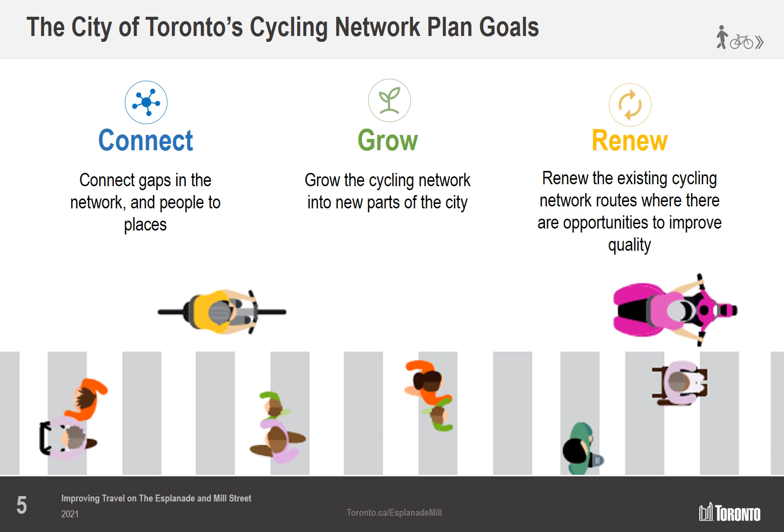Policy, plans, and goals. This project is built on a foundation of policies including the city's official plan, the Vision Zero Road Safety Plan, and TransformTO. Toronto's council-approved cycling network plan is based on three pillars: connect, grow, and renew the cycling network. This part of the city has seen recent extensions of the cycling network such as Sumach Street last year, enhancements to existing routes such as Shuter Street, and we'll be seeing more such improvements to Cherry Street south of Lakeshore later this year, but gaps still exist.

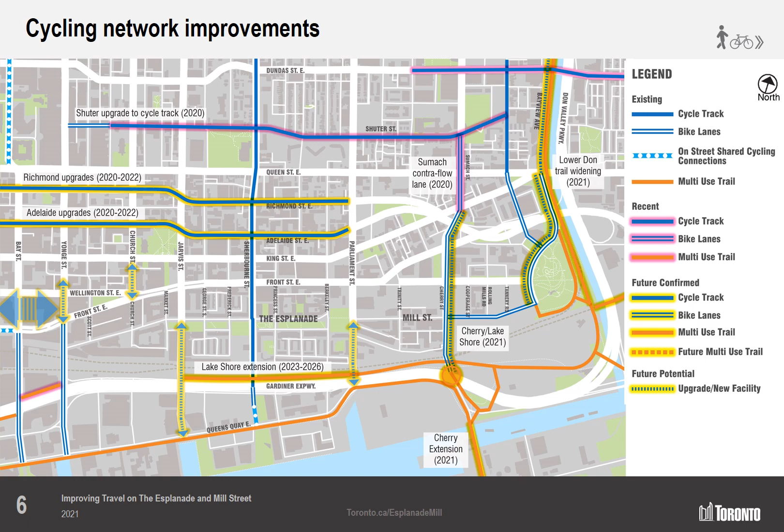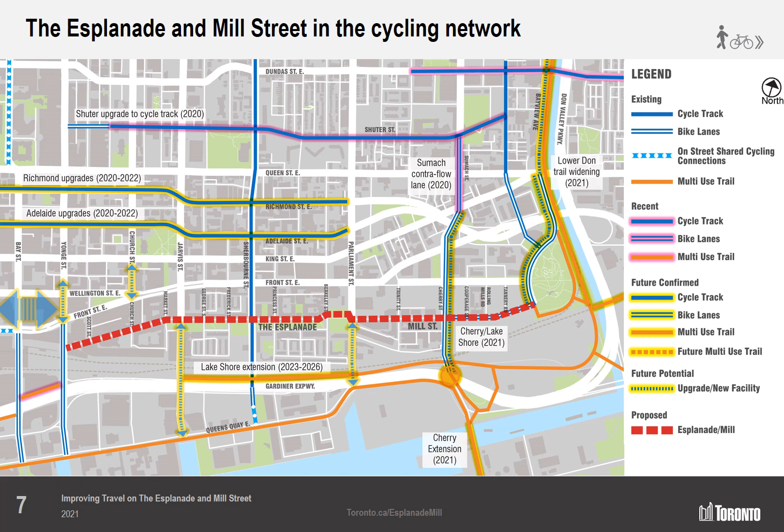The Cycling Network Plan's 2019 to 2021 implementation plan includes the Esplanade and Mill Street. This 2-kilometer corridor would form a vital cycling route for local residents and businesses and would help people cycle to the Lakeshore East and Lower Don multi-use trails and to the Waterfront Trail. The project goals are to improve safety for everyone, make walking, cycling, and taking transit more attractive, and maintain access to local and citywide destinations. The project scope involves working mostly within existing curbs as no major road reconstruction is planned in the foreseeable future. However, there is an opportunity to work with the planned David Crombie Park revitalization.

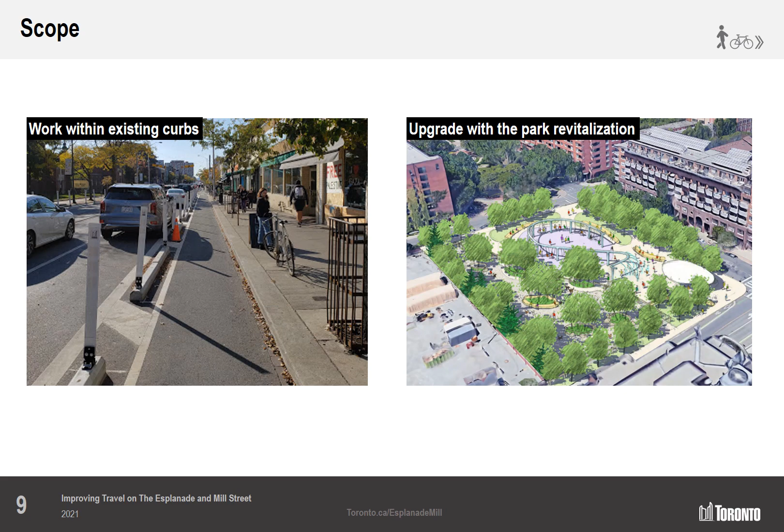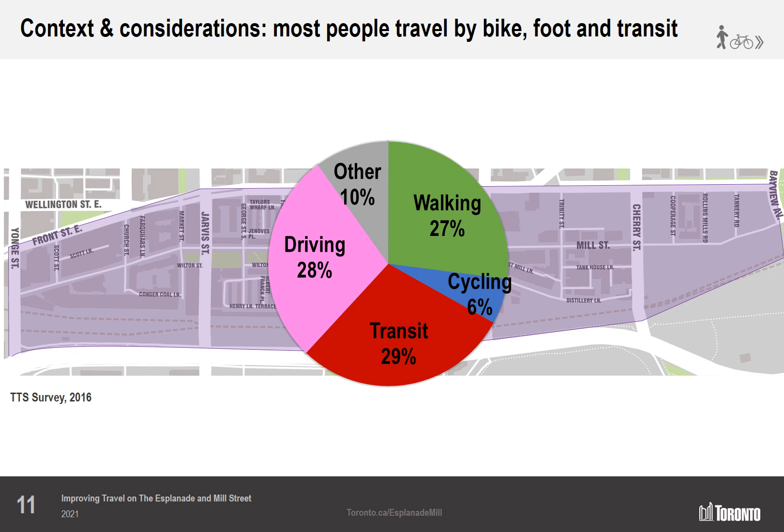Here are some of the project's context and considerations. Toronto has seen an increase in walking, cycling, and transit mode share and a decrease in people driving. In these neighborhoods, the majority of trips are on foot, bike, and transit. In addition to the vibrant heritage of both the St. Lawrence and Distillery District neighborhoods, more than 5,300 residential units, 650 hotel units, and thousands of square meters of commercial development is under construction or proposed right now. By building a bikeway before new residents and employees move in, we can provide an alternative mode choice at precisely the time people are developing their transportation habits.

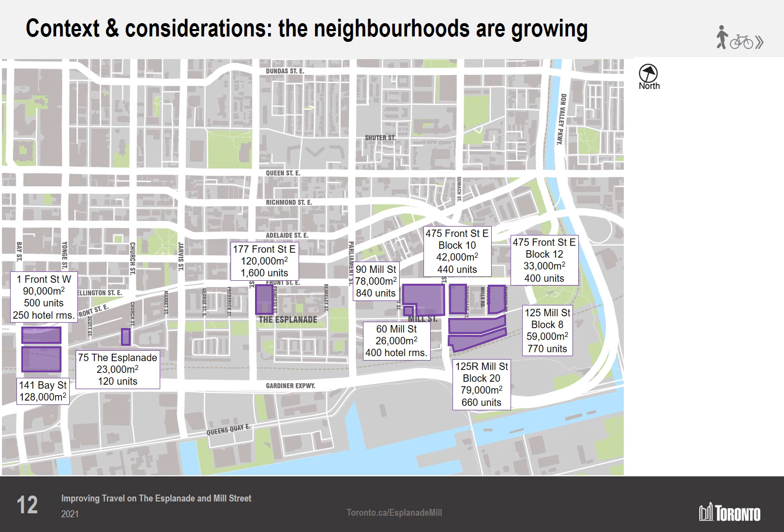The city's own redevelopment plans for key sites includes the St. Lawrence Market redevelopment, opening in spring next year, and the First Parliament site undergoing a master planning process. The Ontario Line as proposed would change transportation patterns in the neighborhood. The Esplanade Mill Bikeway would be within a block of the proposed Corktown station and a short bike ride to the East Harbour Interchange station. This project would help stitch together a series of parks, improve access to green spaces, and reduce traffic stress, noise, and pollution.

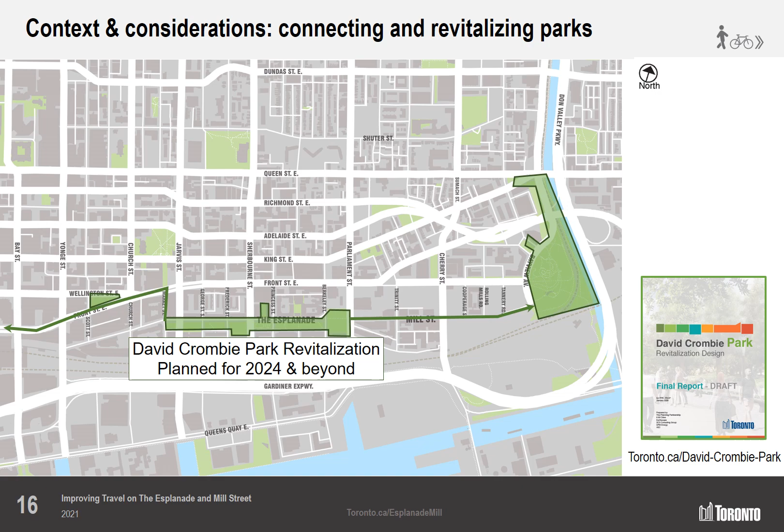There have been over 340 reported collisions along the corridor between 2015 and 2019, 10% involving someone walking or cycling, and 1% leading to serious injury and death. This does not include the recent death of Trisha Waldron, an active community member, at the Mill Street and Cherry Street intersection. The Esplanade and Mill Street are busy year-round with people walking. Near Yonge Street, people move to and from Union Station. The Esplanade carries many visitors to the St. Lawrence Market. The Distillery District is always busy and becomes a regional destination during its annual Christmas market.

Some people cycle on the Esplanade and Mill Street alongside traffic, but the number of cars traveling on these roads today exceeds the city's threshold for people cycling and driving to mix. Some people choose instead to cycle on the pedestrian promenade in David Crombie Park, which creates uncomfortable conditions for people both walking and cycling. People driving are using the Esplanade and other local streets to bypass Front Street and Jarvis Street on their way to or from the Gardiner Expressway or the commercial area west of Jarvis. This non-local traffic leads to congestion on the Esplanade. On the other hand, taxis, ride-hailing services, delivery vehicles, and access to parking facilities bring the area to life, support local businesses, and are important considerations.

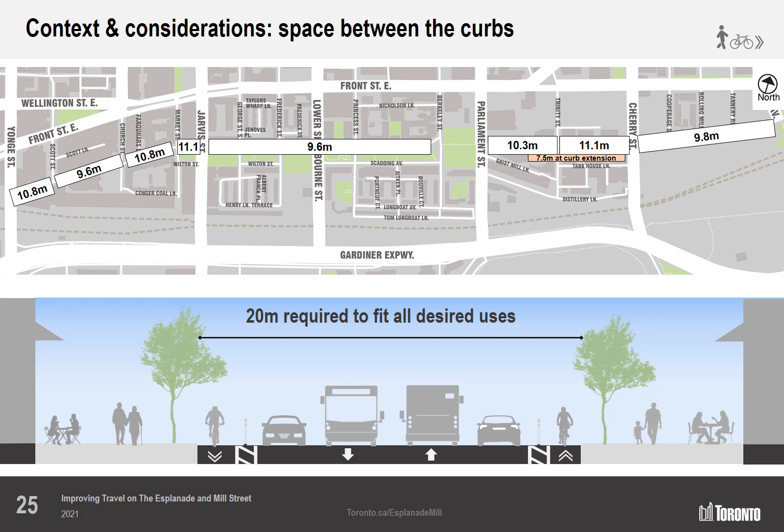In pre-COVID traffic conditions, the TTC 121 bus is sometimes delayed because of the non-local traffic. This bus is vital to residents and businesses, especially for local seniors. The existing curbside uses you see here and several others have been analyzed and considered alongside the curbside uses on nearby streets, and more than 5,000 off-street parking spaces. 20 meters between the curbs would be required to fit an ideal design for all road users. But there is only half that, between 9 and 11 meters for different blocks.

What we heard. The city conducted an initial round of public consultation in fall 2019. We've also gathered public feedback from the ActiveTO Quiet Streets Survey and the Esplanade 2020 Senior Safety Zone Review. A summary of public feedback can be viewed on the project website. In addition to the considerations mentioned, we heard there's a desire to make these changes as soon as possible and that they have long-lasting benefits.

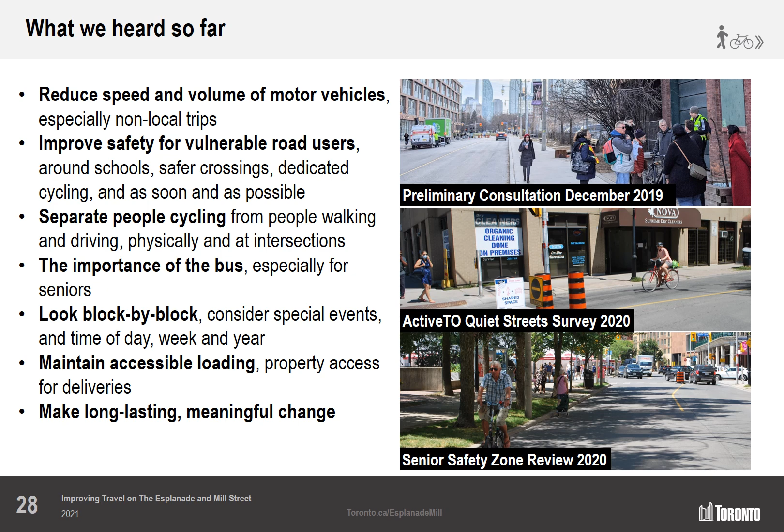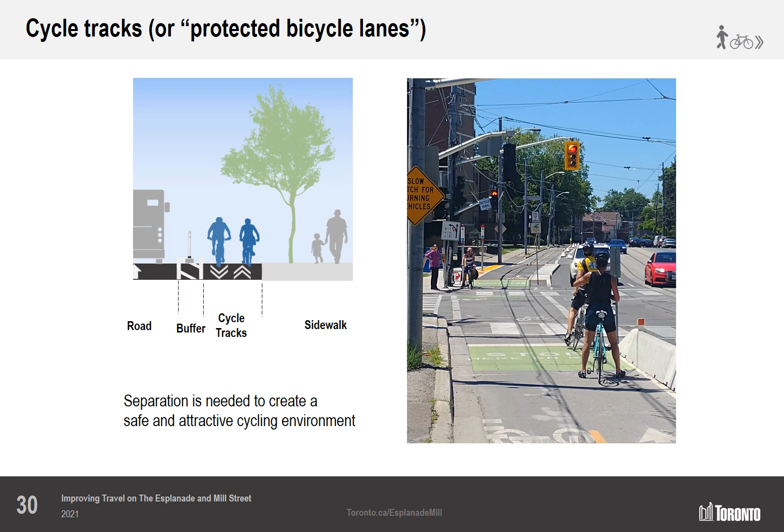Which leads us to what is being proposed. Physically separated bike lanes, also known as cycle tracks, are proposed to be added to both the Esplanade and Mill Street. For both streets, bi-directional cycle tracks are proposed. Bi-directional cycle tracks allow cycling in both directions on one side of the road.

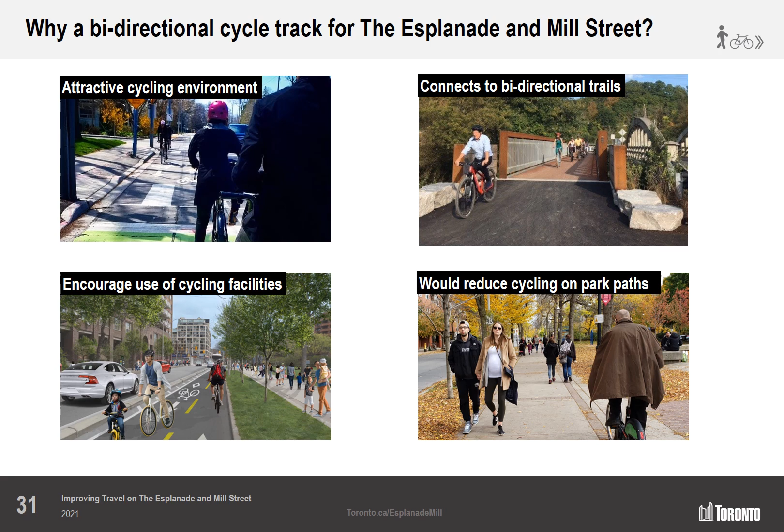They're attractive to a wide range of people of all ages and skill levels. They would connect to other bidirectional trails to the east and would encourage people to use the cycling facilities instead of the promenade. Let's focus first on the Esplanade.

A south side bidirectional cycle track would be added to the whole of the Esplanade corridor. Some blocks would be dedicated to TTC only, and others would be converted to one-ways. A context-sensitive approach is applied to each block, but also considered at the network level. Owen will now walk you through the proposed changes block by block, starting at Yonge Street.

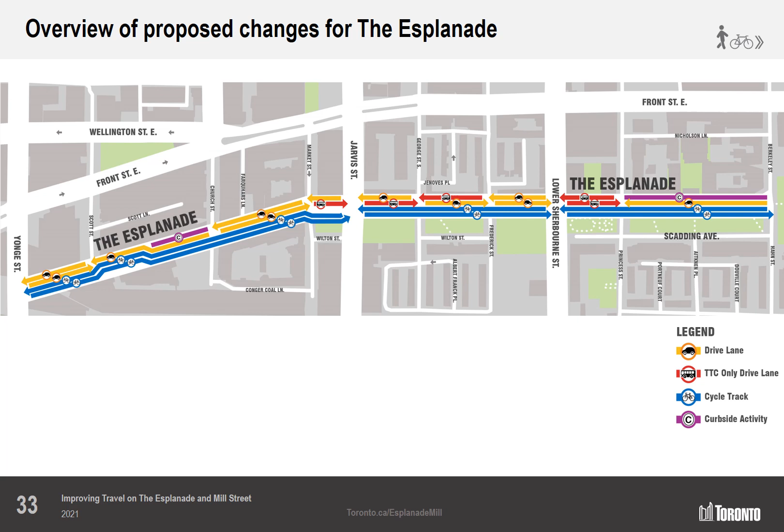Thank you, Adam. Between Yonge Street and Scott Street, the Esplanade would have one vehicle travel lane per direction. At the Yonge intersection, an exclusive east-west pedestrian and bicycle signal phase is under study. This would provide dedicated time for people to cross Yonge on foot or bike, followed by dedicated time for drivers to turn from the Esplanade or 141 Bay onto Yonge Street.

Access to and from the Green P Garage and both directions of the Esplanade would be maintained. Bollards would be used to narrow the driveway opening and slow vehicle turns across the cycle track and sidewalk. Most curbside activities would be prohibited through no standing regulations. Parking and loading is available on nearby Scott Street, and 2,000 parking spaces are available within the Green P Garage.

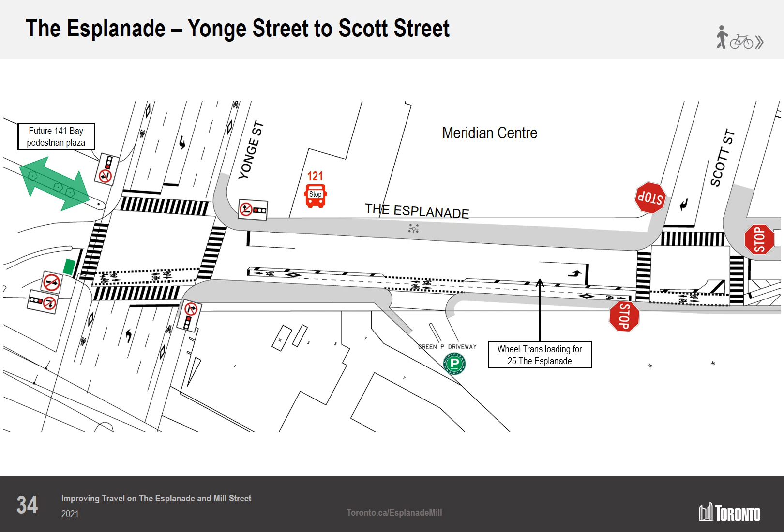The Scott Street intersection would remain an all-way stop, including for the cycle track. The eastbound lane would be wider before the intersection to provide more room for Wheel-Trans loading at 25 the Esplanade.

Between Scott Street and Church Street, the Esplanade would become one-way westbound for vehicles. Access to the Novotel and private garage would be maintained both from this block and via the laneway at the foot of Church Street. To improve sightlines for drivers exiting the driveways framed by the colonnade, the bikeway would bend toward the center of the road.

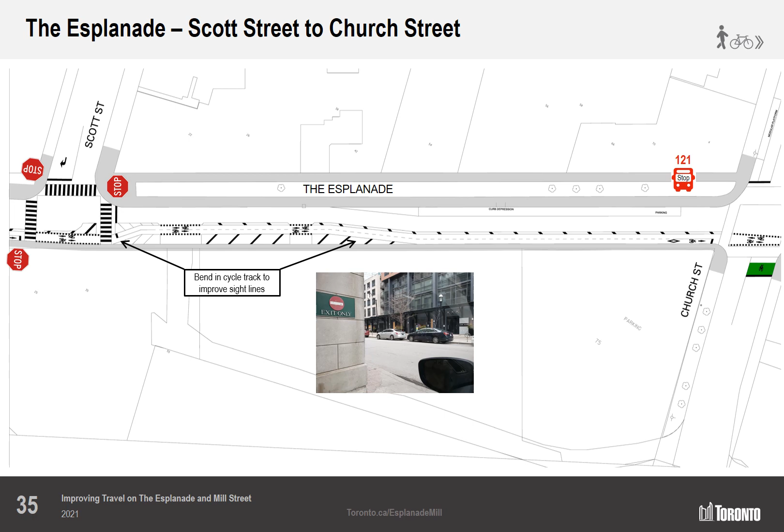A dedicated no-standing zone would serve pickup and drop-off, including coach buses. The commercial loading zone would be shifted, with the remaining space west of the bus stop available for parking. At the Church Street intersection, the bus stop for the eastbound 121 would be relocated onto the west side of Church Street, just north of the intersection.

Two-way traffic would be maintained between Church Street and Market Street to provide circulation in both directions. The two bus stops just west of Market Street would be removed due to close spacing with the stops at Church or Jarvis. Goods loading would be permitted within the no parking zones on Church Street. The accessible loading zone on the south side of the Esplanade would be maintained.

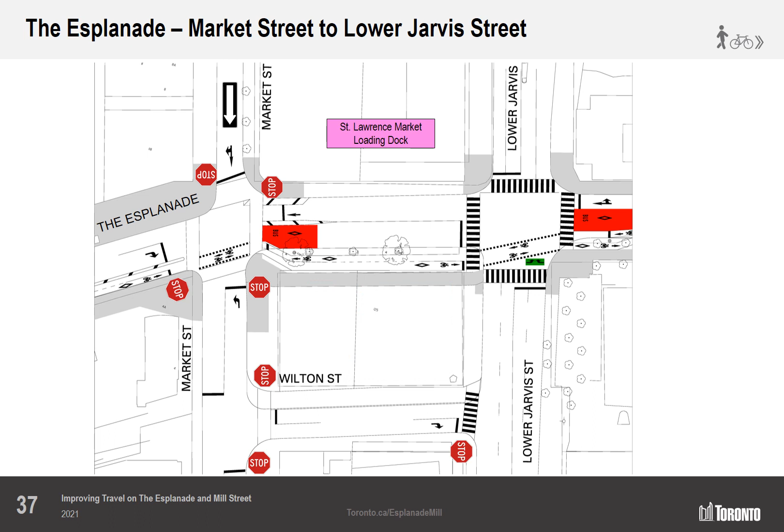When the new St. Lawrence Market North building opens, the tent will be removed and the lot will become vacant. This would allow the cycle track to be shifted above the curb and parallel to the sidewalk. This would reduce conflict with trucks using the St. Lawrence Market loading dock.

The cycle track would cross the south leg of the Esplanade-Jarvis intersection, with the south crosswalk next to it connecting to the Park Promenade. To remove conflicts across the south crosswalk, several traffic changes on this block are proposed. Wilton Street would remain open as a two-way street. The left turn from Wilton onto northbound Jarvis would be restricted due to the close spacing with the signal at the Esplanade. The east approach to the Esplanade-Market intersection would become one-way westbound.

A short eastbound bus lane would allow continued TTC and Wheel-Trans access. Vehicle traffic on the Esplanade eastbound would be required to turn right onto Market Street. The westbound left turn from the Esplanade onto Jarvis would be prohibited at all times to discourage traffic destined for the Gardiner or Lakeshore from using the Esplanade.

The westbound left turn from the Esplanade onto Market Street would also be prohibited to reinforce the Jarvis turn restriction and prevent drivers from bypassing it on Market Street or Wilton Street. Access to the St. Lawrence Market loading dock would be maintained to and from Jarvis in both directions to provide direct arterial access. Trucks could also exit to the west.

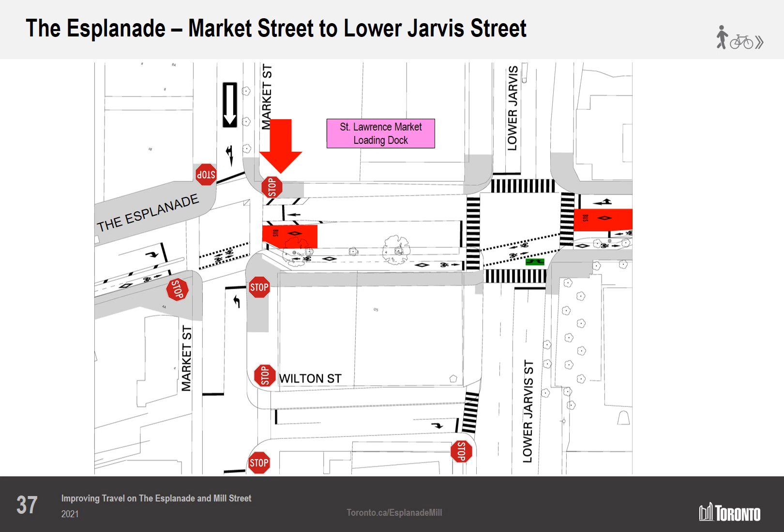Between Jarvis Street and George Street, the Esplanade would be converted to one-way westbound except TTC to prevent eastbound traffic infiltration into the neighborhood and to reduce the overall volume so accessible loading, westbound traffic, and buses in both directions can share the narrowed roadway space.

The block from George Street to Frederick Street would become one-way eastbound except TTC to reduce westbound traffic infiltration through the neighborhood and further reduce traffic on the Jarvis to George block. Eastbound vehicle traffic would be permitted from George Street to Lower Sherbourne Street. Westbound vehicle traffic would be permitted from Lower Sherbourne Street to Frederick Street and from George Street to Jarvis Street. Drivers would not be permitted to enter the Esplanade eastbound from Lower Jarvis Street.

Drivers would also not be permitted to turn left from the Esplanade westbound onto Jarvis southbound. An eastbound bus lane would be provided from Jarvis Street to George Street. A westbound bus lane would be provided from Frederick Street to George Street. These bus lanes allow two-way TTC bus and Wheel-Trans service to be maintained between Lower Jarvis Street and Lower Sherbourne

Street. George Street would be converted to one-way southbound with a northbound contraflow bike lane from the Esplanade to Wilton Street to prevent bypassing of the westbound prohibition via Wilton. Zebra crossings would be painted at all four crosswalks at the George Street and Frederick Street intersections.

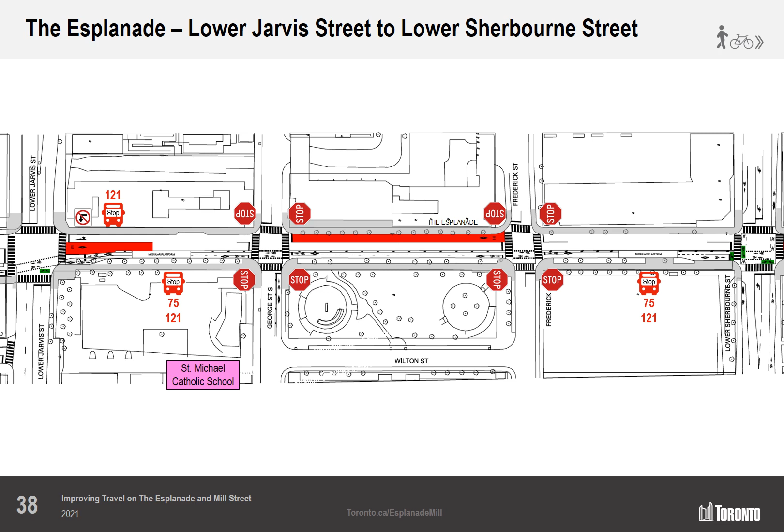At the Sherbourne intersection, the proposed cycle track would intersect the existing Sherbourne cycle tracks. Two-stage turn boxes would be provided to facilitate bicycle turns between the Esplanade and Sherbourne. Between Sherbourne and Princess, the Esplanade would be converted to TTC only in both directions. The Princess to Berkeley block would be converted to one-way westbound to maintain curbside space along the north curb in front of the community center and Market Lane School.

The conversion of this block to one-way westbound would require adjustments to the existing TTC routes on this block. The eastbound 121 bus is proposed to turn north at Princess Street, then go east along Front Street. The loop for the 65 Parliament bus would be reversed to go clockwise so that it would run westbound on this block. The westbound 121 bus would maintain its current routing. Bus stops would be relocated in accordance with the proposed route changes.

A westbound stop would be provided along the north curb near the community center to serve the 65 and westbound 121. The eastbound 121 would maintain a stop at the Esplanade and Princess intersection, likely relocated to the northeast corner. An additional eastbound stop is proposed on Front Street at Berkeley.

Removal of the existing weekday morning westbound left turn prohibition at Front and Berkeley is under review, since westbound traffic infiltration would be prevented by the proposed TTC only operation between Sherbourne and Princess. Zebra crosswalk markings would be added at the Princess Street and Berkeley Street intersections. East of the pedestrian crosswalk, the 4 accessible parking spaces would become 2 accessible loading spaces.

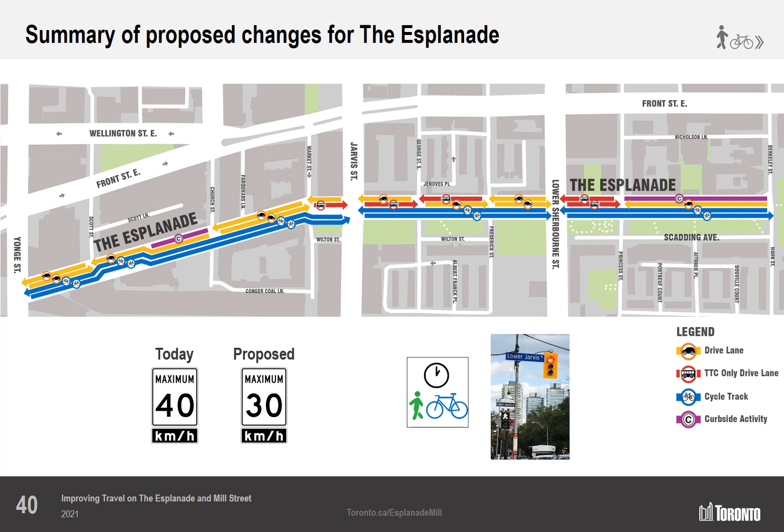George Street between the Esplanade and Wilton Street would be made one-way southbound to prevent Wilton Street from becoming a bypass of the one-way conversion on the Esplanade. It would also reduce traffic near St. Michael's School. School bus loading on the west side of George Street south of the Esplanade would remain, but parking would be removed. The north half of Farquhar's Lane would be made one-way northbound to reduce local traffic infiltration and vehicle volume crossing the busy Front Street sidewalk.

Otherwise, intersecting streets would not be changed. Access to the neighborhood by vehicle would be available to Front Street, Yonge Street, Sherbourne Street, and Jarvis Street, depending on the block. To enhance the pedestrian focus of both Market Street and Front Street, westbound left turns from Front Street onto Market Street would be prohibited.

Westbound left turns at King and Jarvis would be prohibited during weekday afternoons to address existing streetcar delay and prevent westbound displacement shifting from the Esplanade. Eastbound and westbound through restrictions would remain. The addition of a pedestrian head start at the Front and Jarvis intersection is under review.

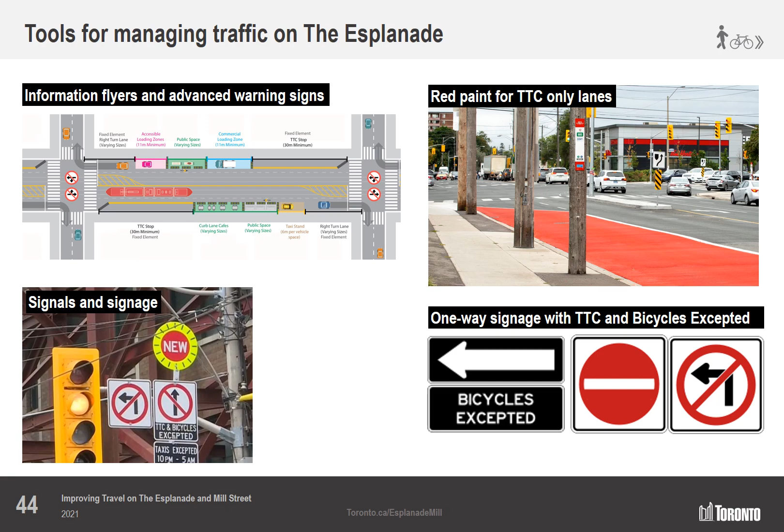Several tools would be used to communicate the traffic changes to road users. Prior to installation, information flyers would be sent to area residents to communicate the traffic pattern changes. New regulations would be communicated using signage, pavement markings, and signals where applicable. Solid red pavement markings would be installed within the proposed exclusive TTC lanes to emphasize that these lanes are only for transit use. Now we'll talk briefly about Parliament Square Park.

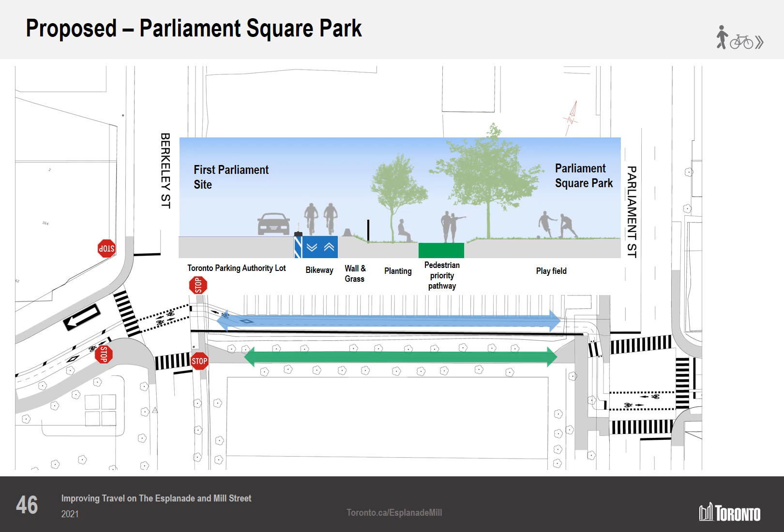With the number of people walking and cycling, the existing park path is too narrow, so a dedicated bikeway is proposed through the parking lot just to the north of the park.

We will now continue east along Mill Street. A new south side bi-directional cycle track would be added to the whole Mill Street corridor and one block on Bayview Avenue up to Front Street East. Some blocks would be converted to one-way westbound to free up space for the cycle track. Now let's walk through the context-sensitive design block by block.

The bi-directional cycle track would cross the south side of the Parliament intersection. A fully protected signal phase is proposed for the south crosswalk and bike crossing, separating these crossings from vehicles turning left from westbound Mill. Between Parliament and Trinity, Mill Street would be converted to one-way westbound for vehicles. The existing parking lane along the south curb would remain but be offset from the curb, with the cycle track placed between the parking lane and sidewalk.

To accommodate both passenger pickup and goods deliveries, the short-term parking zone is proposed to be doubled from 2 to 4 spaces. The remaining space on the south side would continue to provide the current no standing, no parking, and paid parking regulations.

Between Trinity and Cherry, Mill Street would be converted to one-way westbound for vehicles, with a parking and loading lane along the north curb, freeing space to be reallocated for the cycle track. The bi-directional cycle track would continue along the south side of the street. The existing 10-minute parking spaces on the south side of Mill Street would be relocated to the north side.

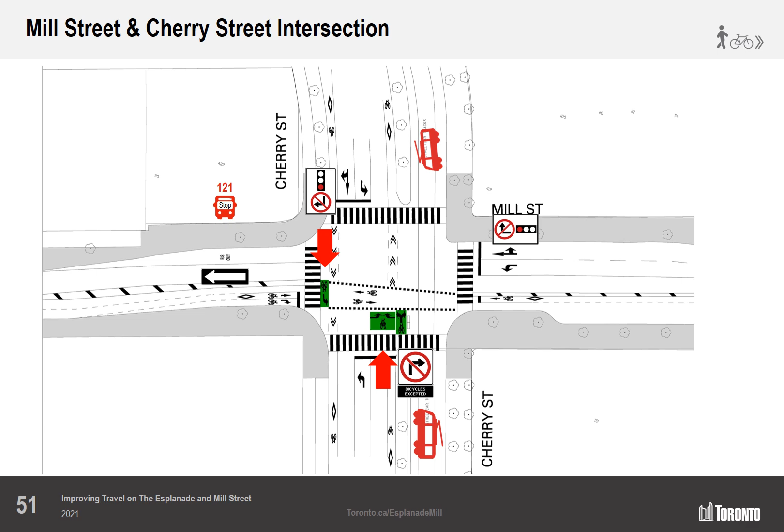Other two-stage turn boxes would accommodate bicycle turns from the Mill cycle track to northbound Cherry and from southbound Cherry to eastbound Mill. Here is a rendering of the Mill-Cherry intersection as proposed, showing bicycle turn queue boxes, paint, and signal work.

East of Cherry, the existing painted bicycle lanes in each direction would be converted to a bidirectional cycle track along the south side. Vehicles would be allowed in both directions. Parking would be removed from the south side laybys since they would be blocked by the cycle track separation. The bus loading zone would be relocated to the north side layby between Cooperage and Rolling Mills.

Continuing east, the existing painted bicycle lanes in each direction would be converted to a bidirectional cycle track along the south side. At the Bayview and Mill intersection, the bidirectional cycle track would provide a direct connection to the Corktown Common Trail and onward connections to the Lower Don Trail, Lakeshore East Trail, and the proposed East Harbour GO and Ontario Line station. Vehicle traffic at this intersection would be converted to one-way southbound to westbound.

Mill would be one-way westbound from Bayview to Tannery with two-way operation west of Tannery. Parking would be removed from the south side laybys since they would be blocked by the cycle track separation. Parking would be preserved in the north side laybys.

On Bayview Avenue between Mill and Front, the existing painted bicycle lanes in each direction would be converted to a bidirectional cycle track on the east side. This block would become one-way southbound for vehicles. Parking would be preserved in the west side layby and removed from the east side layby. A two-stage turn box would be provided at the Bayview and Front intersection to allow people cycling southbound on Bayview to cross from the existing bicycle lane to the cycle track.

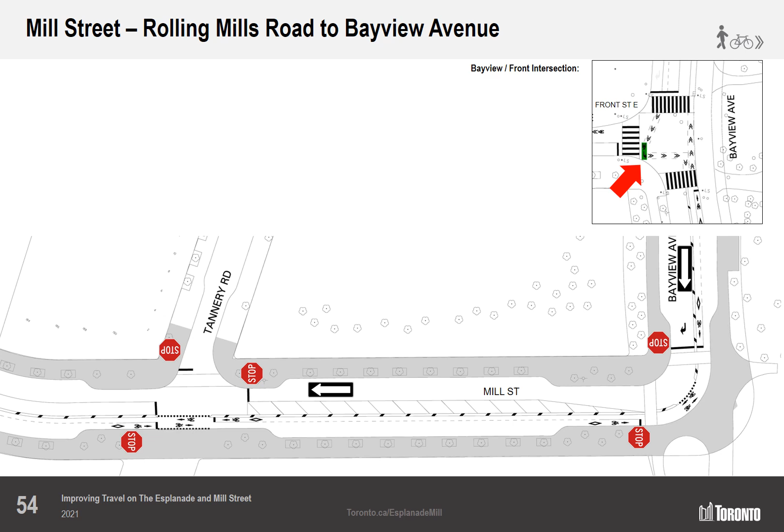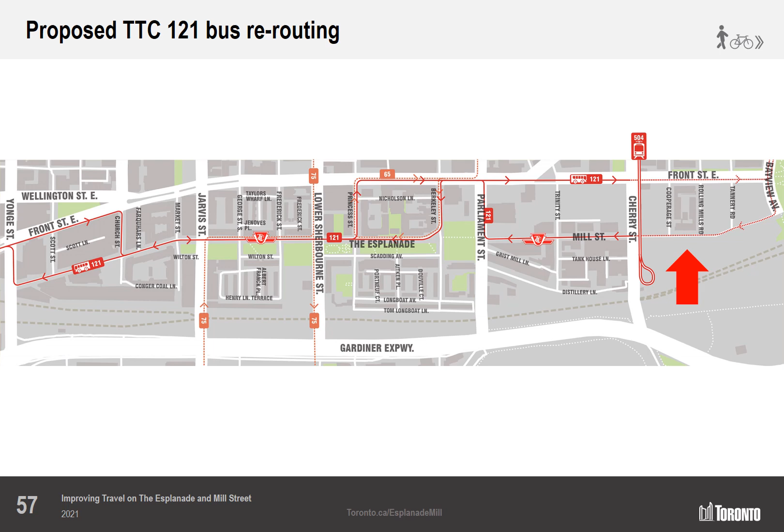These are the TTC routes today. In the new configuration, the eastbound 121 would turn on Church Street, not Scott Street, and on Princess Street, not Berkeley. It would continue on Front Street and up to Bridgepoint Hospital before returning on Mill Street westbound. Bus stop locations would also be moved to improve the speed and reliability of these routes.

Permit parking areas 6H, 6K, and 6N serve this area of the city. With the proposed changes, areas 6H and 6K would remain under capacity. Area 6N is at capacity today. This would be maintained by adding permit parking spaces to Front Street.

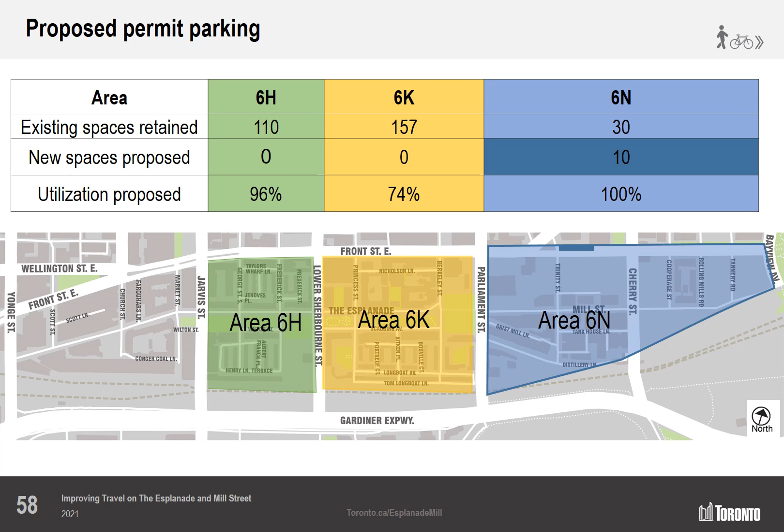Implementation. Phase 1 east of Lower Sherbourne Street is proposed to be installed toward the end of 2021 to maintain a cycling connection between the downtown and the waterfront during planned construction. Phase 2 is proposed to begin west of Sherbourne Street in 2022. This allows for the planned removal of the St. Lawrence Market tent. For most of the corridor, road-level bidirectional cycle tracks with concrete curbs, paint, and new signal timing are proposed to be implemented over the next 2 years.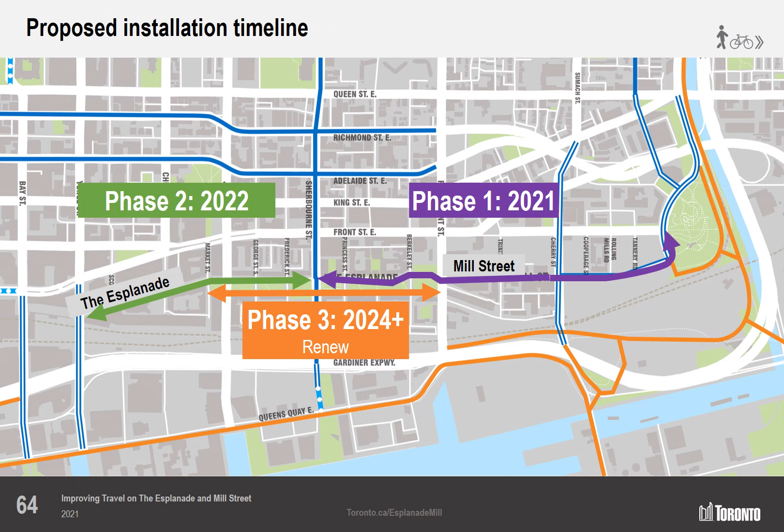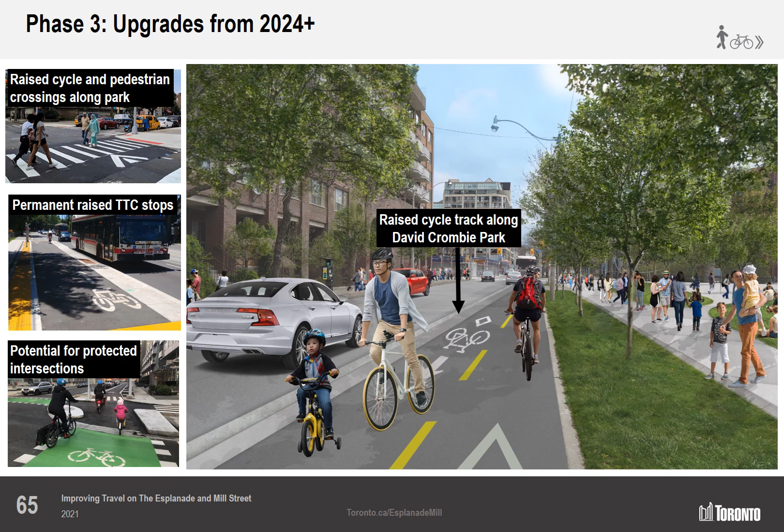Phase 3, as early as 2024, could include raised cycle tracks along David Crombie Park, raised cycle and pedestrian crossings at minor park intersections, permanent raised TTC stops, and potential for protected intersections.